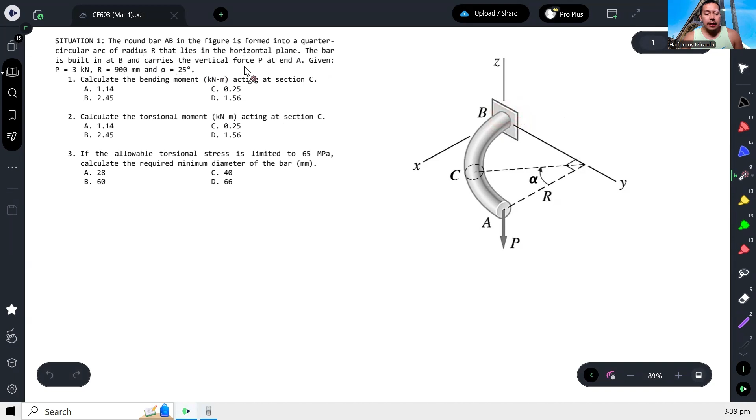All right, situation number 1, similar to a past board exam question. A round bar AB in the figure is formed into a quarter circular arc of radius r that lies in the horizontal plane. The bar is built in at B, meaning this is a fixed support, and carries a vertical force P at the end at A. There's a vertical force here. You're given P to be equal to 3 kilonewtons, R is 900 mm, and let's consider alpha to be 25 degrees. Calculate the bending moment acting at section C. So we need to find the bending moment here.

Let me discuss this. If you have a cross-section, it has a plane. Let's say this is the plane of the cross-section.

Now if you apply a load somewhere, let's say here, that load will have a distance with respect to its own longitudinal axis. Let's say this is the longitudinal axis. So it has two distances: this distance from the longitudinal axis, let me call that E1, and this distance going to the plane.

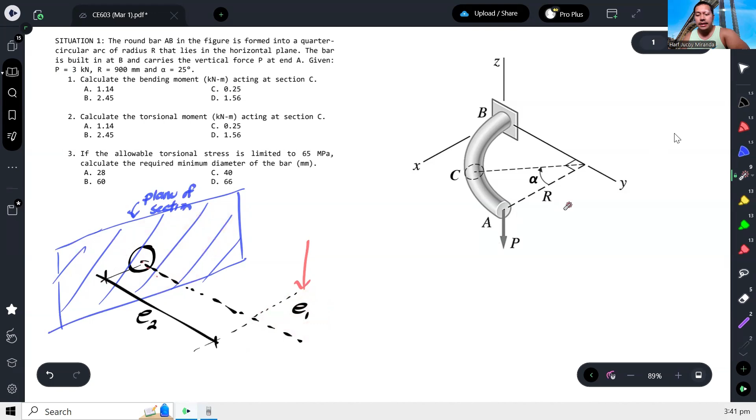Let me call that E2. In this drawing, E1 and E2 are both eccentricities, but they have different effects. This eccentricity, as you can see, is parallel to the plane of our section. When that happens, it means this is considered an in-plane eccentricity, or parallel to the plane of the section.

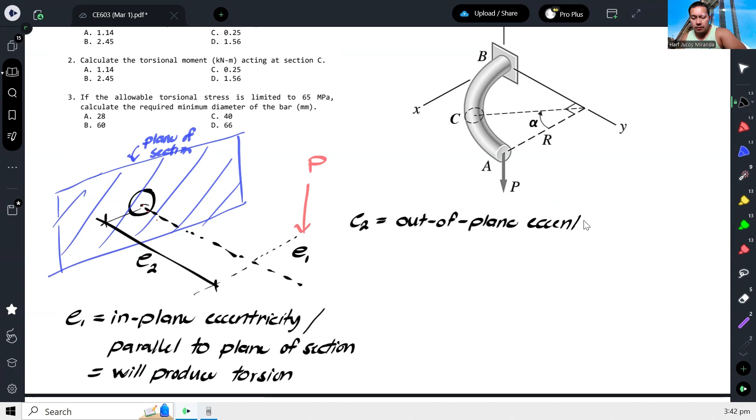When it's like that, this eccentricity will produce torsion - it will produce twisting about this axis. Then E2, let's say this is force P, E2 is what we call an out-of-plane eccentricity, or that which is measured perpendicular to the plane of the section.

As you can see, this is the distance - it's perpendicular to this plane, while this one is parallel to that plane. When it's like that, this will produce bending.

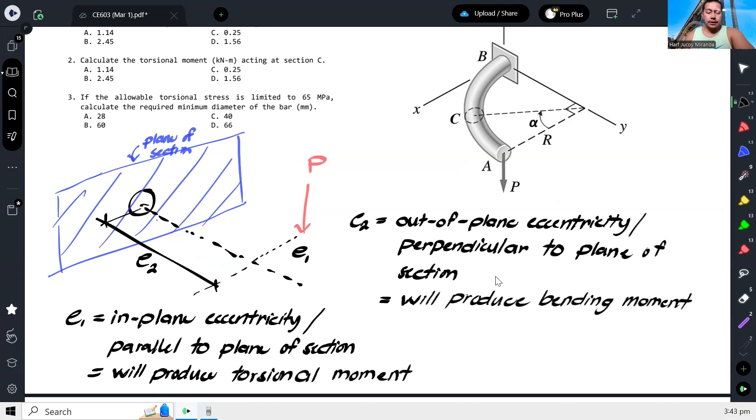Now, if you consider this plane, this section has its plane here. So this is its axis. The perpendicular distance would be measured going to that plane. Here's P, here's the perpendicular distance, then the parallel distance is somewhere here. The best way to visualize this is to view it in the top view.

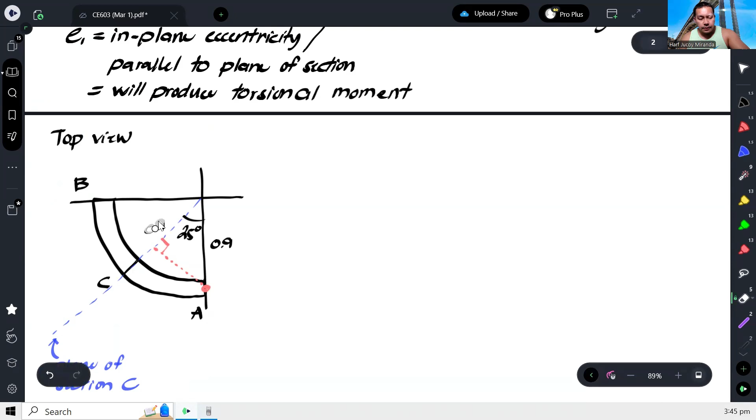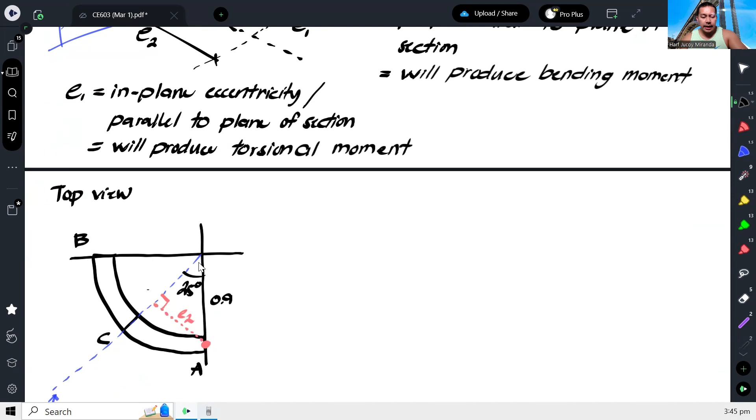Now to calculate, let me draw this out. To calculate this distance, let's call it the out-of-plane eccentricity, E2. Considering this triangle, you'll see that sine of 25 degrees equals E2 over 0.9. So E2 is just 0.9 times sine of 25. That becomes our eccentricity or moment arm to produce a bending moment.

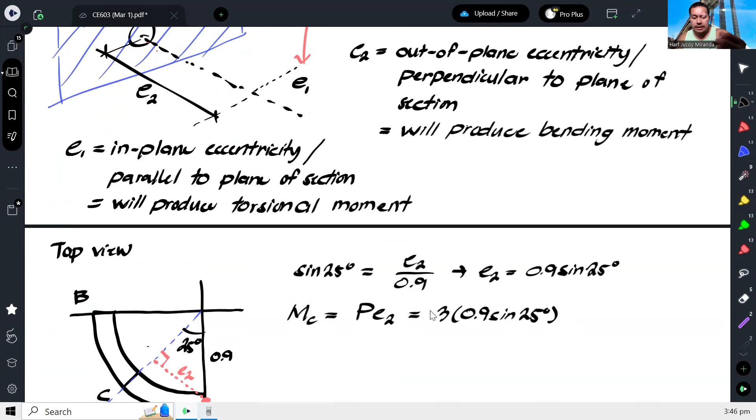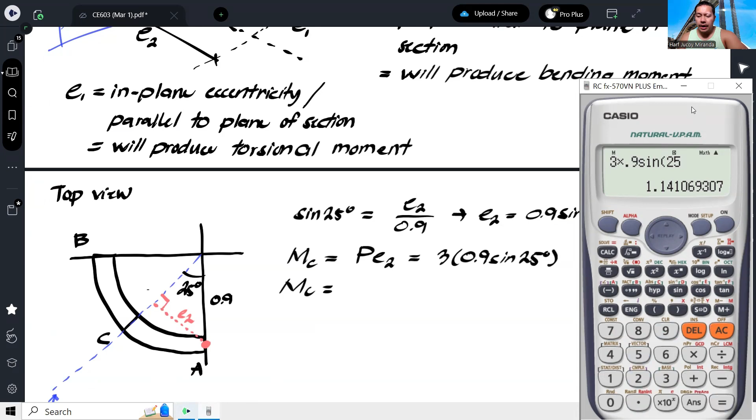So our moment at C, let's call it capital M, the bending moment at C, would be equal to force times E2. The force given here is 3 kilonewtons. So this is 3 multiplied by 0.9 sine of 25 degrees. Our bending moment at C would be equal to 1.141 kilonewton-meter. Now that we have our bending moment, that gives us the answer - since bending moment is what's being asked, that is letter A.

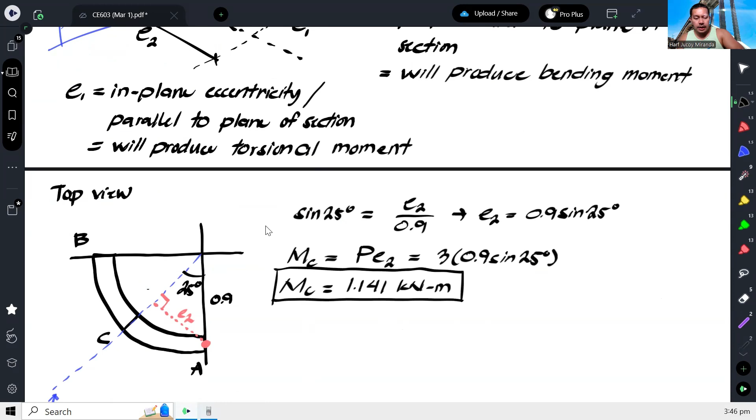Okay, for number 2, kailangan natin yung twisting moment or torsional moment. Ang kailangan natin na eccentricity is yung parallel doon sa plane ng section C, or to be more specific, ito yung longitudinal axis niya. Ibig sabihin, ito yung longitudinal axis, ito yung eccentricity natin, which is also equal to this.

Now to calculate this distance from here to here, note that ang radius natin ay 0.9, so itong buong to ay 0.9. Para makuha natin to, ibabawas lang natin to. Hindi ba ito ay 0.9 cosine of 25 degrees? So therefore, yung natitira dito, which is our eccentricity, E1, will be yung radius minus yung distance na yun.

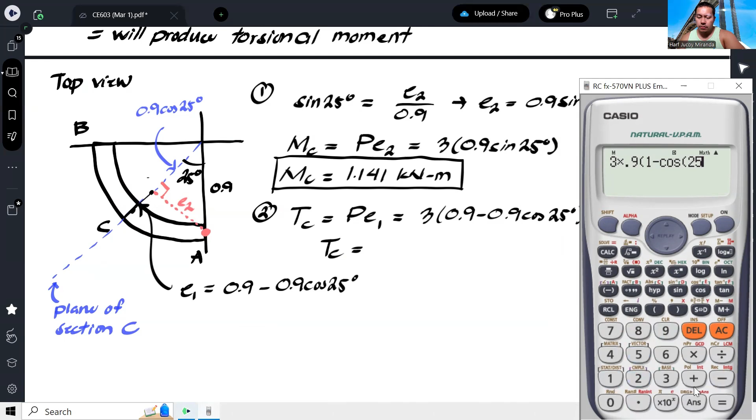Ayan. And from there, we can calculate the torsional moment at C. That is just P times E1. And that gives us 3 kilonewton times 0.9 minus 0.9 cosine of 25 degrees. And that torsional moment is equal to 0.25.

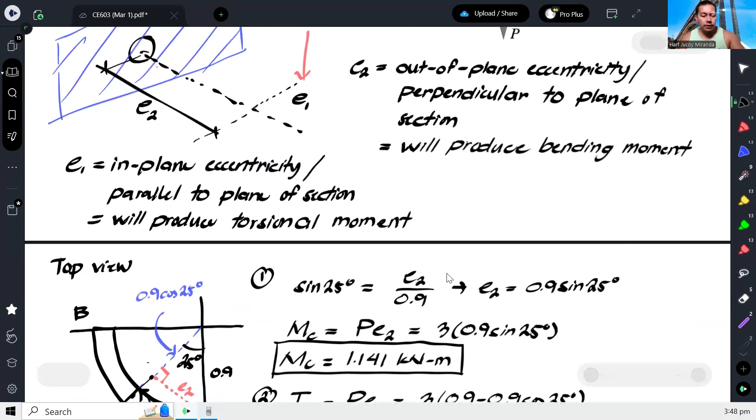Okay, so I think wala namang problema doon, no? 0.25. So dito lang sa number 3. If the allowable torsional stress is limited to 65 megapascal, calculate the required minimum diameter of the bar. So kapag yung torsional stress limited lang dito, ano yung required na diameter?

Okay, so for number 3, yung torsional shear stress ay equal sa T rho over J. Kung saan, kung solid circular shaft yan, pwede mo na i-simplify yan as 16T over pi d cube, at hindi daw dapat ito lumagpas sa 65 megapascals. So ngayon, kapag ginamit natin itong torsional moment na to, we will have 16 times 0.25, gawin natin Newton millimeter, times 1 million over pi times diameter cube. Ma-solve natin yung required diameter.

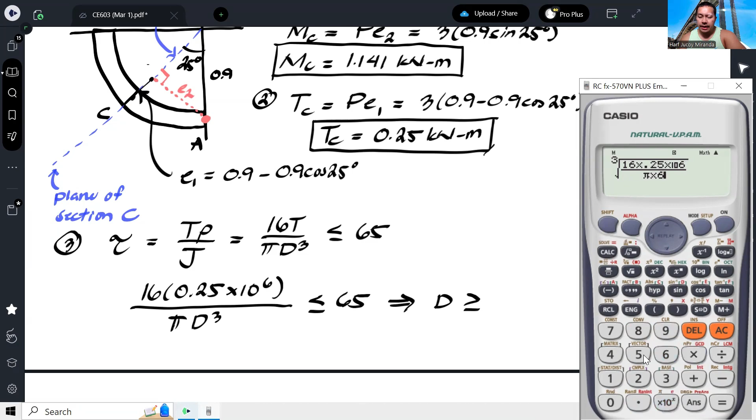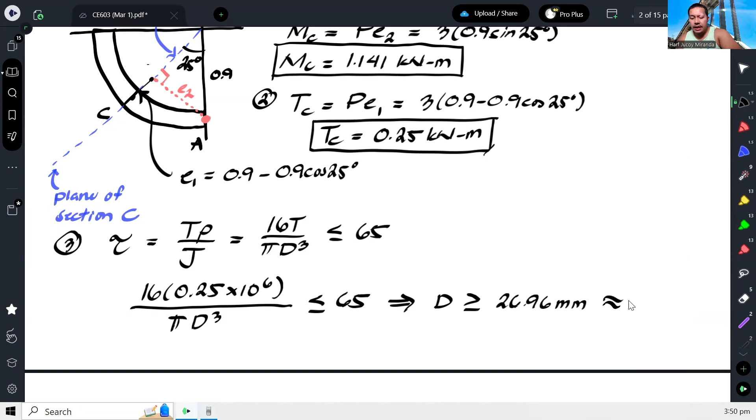So lalabas dyan, a required diameter should be greater than or equal to cube root of 16 times 0.25 million over pi times 65. So lalabas is 26.96 mm. And we can actually say this is 27. Now, you can actually say that's 27, no? The answer would be 27.

However, that would be wrong. Why? Because in this particular shaft or bar, yung maximum torsional moment ay hindi mo naman matatagpuan dito sa C. Actually, meron pang mas malaking torsional moment dyan. At yung mas malaking torsional moment, hindi rin yung sinabi ko na ito, nakalahati na itong 45. Actually, yung pinakamalaking torsional moment dito, guys, ay mangyayari dito sa B, dahil yan yung may pinakamalaking in-plane eccentricity, ito, which is equal to the radius itself.

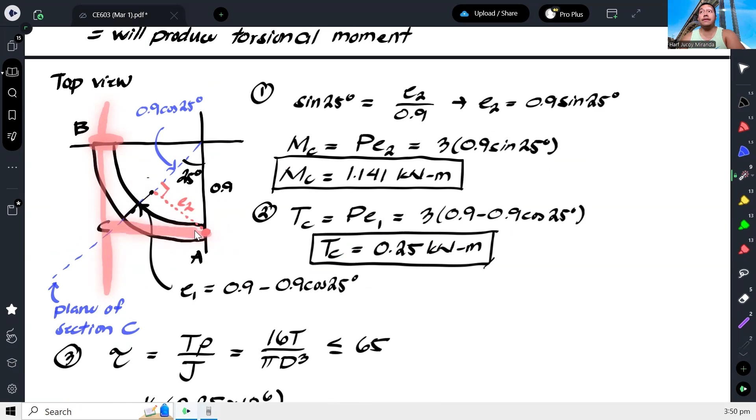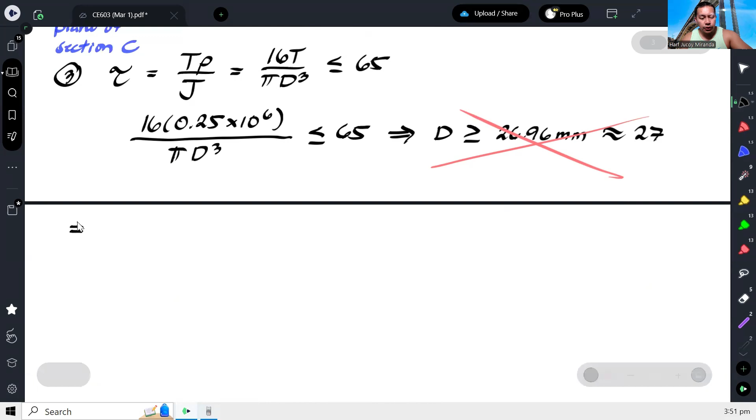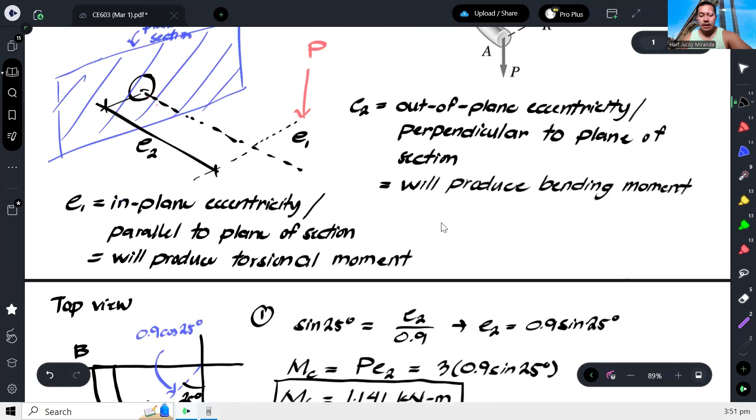Okay, so for number 3, hindi ito yung sagot. Okay, so lagay ko lang to note, maximum torsion will develop at B. Kasi yung B yung merong greatest eccentricity. Dito siya mangyayari, kasi eccentricity natin dyan, ito mismong radius.

Alright, so ang maximum torsional moment natin at B is equal to 3 kilonewton times 0.9, or that gives you 2.7 kilonewton meter. At tingnan nyo naman maigi, ang layo nito dun sa moment na na-experience sa C. So kaya mas malaki to. Ibig sabihin, yung design natin for the diameter will be based on our point B, not section C.

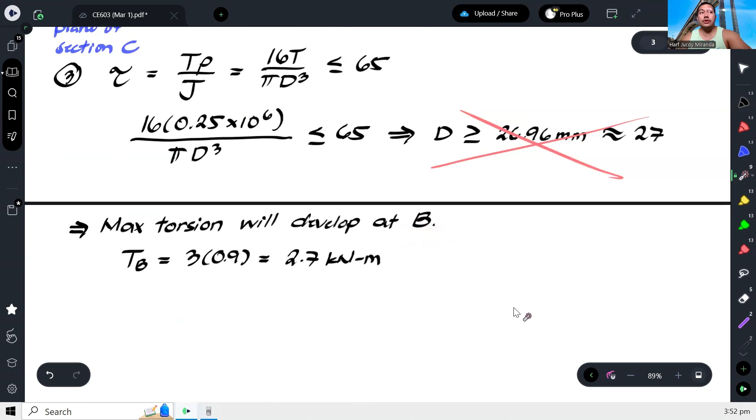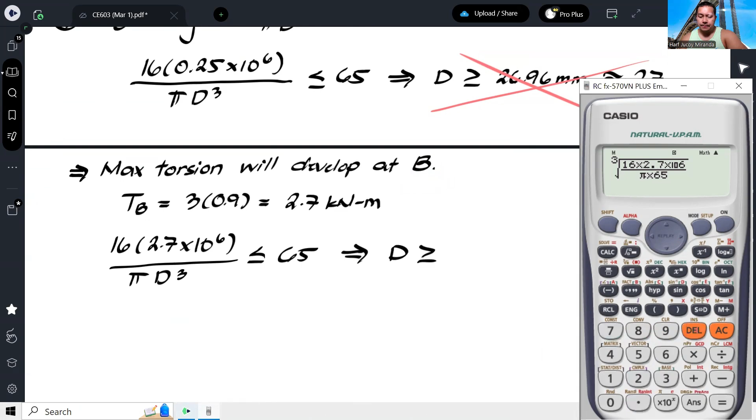Okay, so therefore, ganun ulit, 16T, yung T natin, 2.7 million over pi d cube should not exceed 65. At lalabas ngayon, yung D natin should be at least equal to, papalitan ko lang ito ng 2.7. Okay, it should be 59.58 millimeters, so it should be at least, no. So therefore, we can say that this is 60, o depende sa choices kung ano yung mas pinakamalapit na mas malaki. At dito, yes, that would be 60 mm.

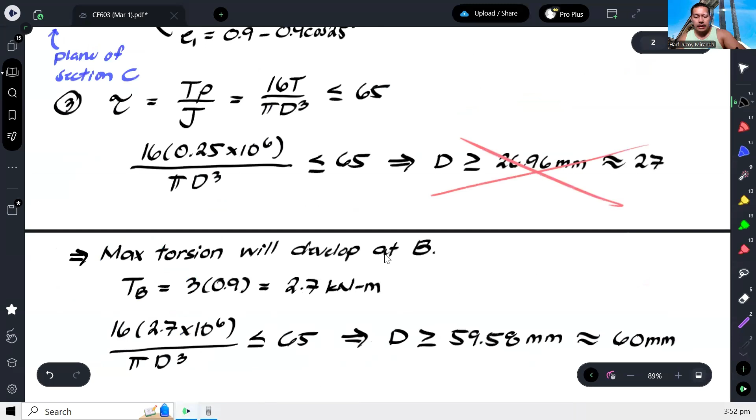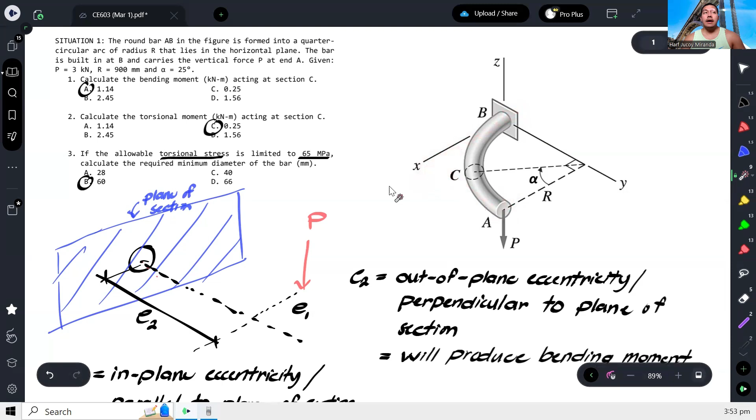Okay, so that should be the correct answer. And again, I just want to reiterate na itong problem na to, pwede kayong ma-trap doon sa huling question. Yung unang dalawa, madali lang, pinapahanap yung bending moment tsaka torsional moment. Tapos, ang ginagawa dito, baka malin lang kayo, pinapersuade kayo na gamitin itong torsional moment na to to calculate the required minimum diameter. Pero actually, hindi naman sa section C mangyayari yung maximum torsional moment. Mangyayari siya dito sa section na to, kasi yun yung may pinakamalaking in-plane eccentricity. Okay, and that's how we solve this problem.